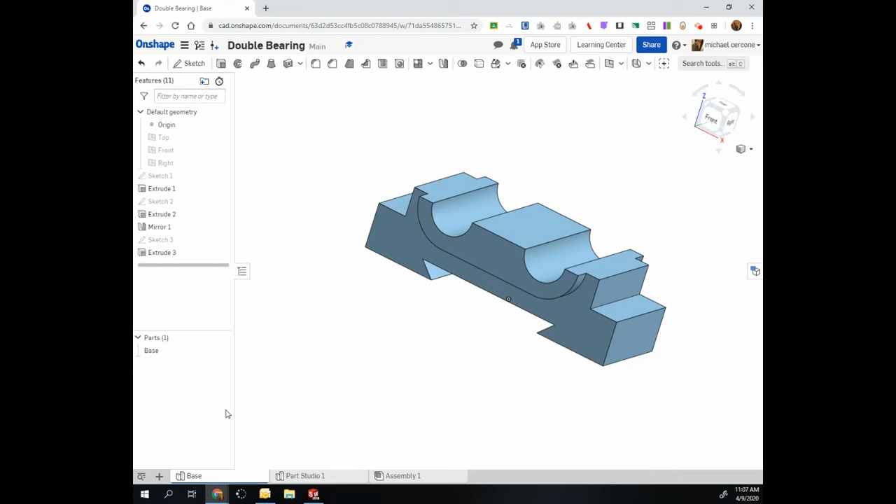I do want to remind you that I am just winging this. I have not practiced, so there may be mistakes.

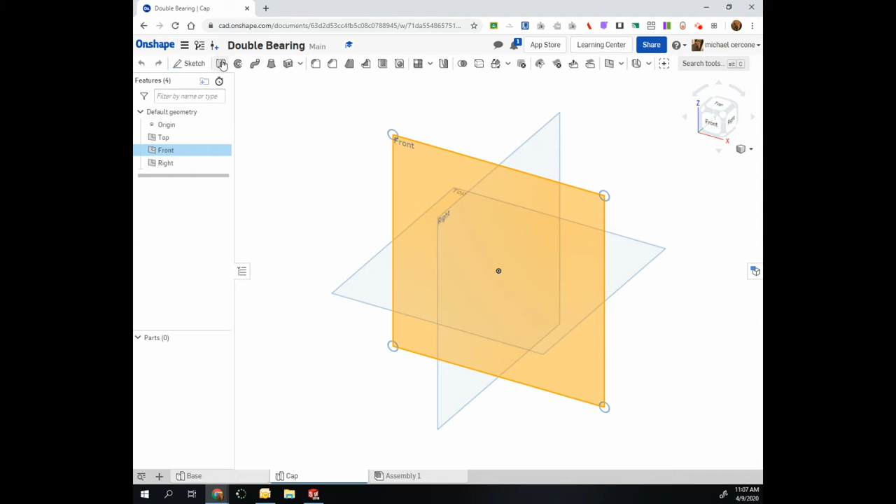Now I'm going to do the cap. So let me rename this for the sheet, and then I will rename the parts later. I'm going to start this the same way, starting along my front. And I'll start my sketch. I don't want to see any of these planes, so I turn them off. I'm going to go normal to.

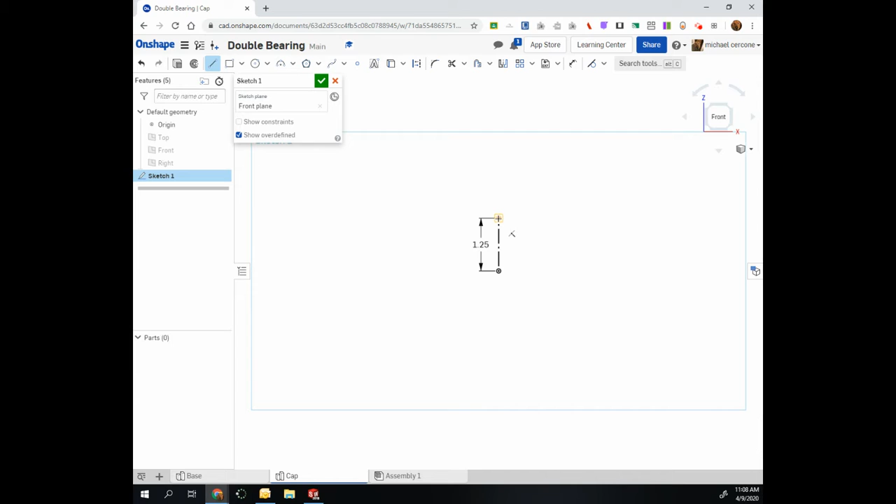I like the idea of starting with a construction line at the proper height. And now I'm going to just create the basic feature again. So align. This is 3.5. This time I'm adding the dimensions as I draw. So here's my basic feature.

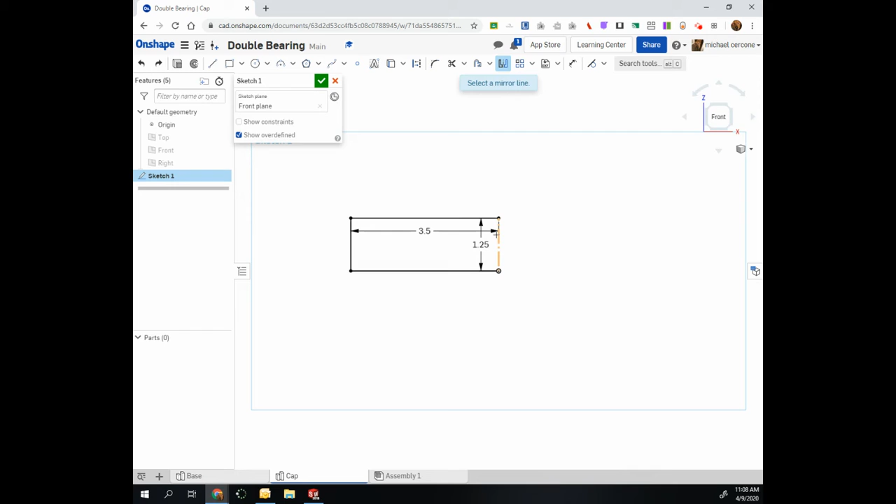I could mirror this. Now I could have drawn this from the top. I just decided to follow the same pattern that I went with on the first video. So that was a mistake. So mirror, select mirror line. Okay, this is an extrude, and I'm looking for symmetric and a distance of 3 again.

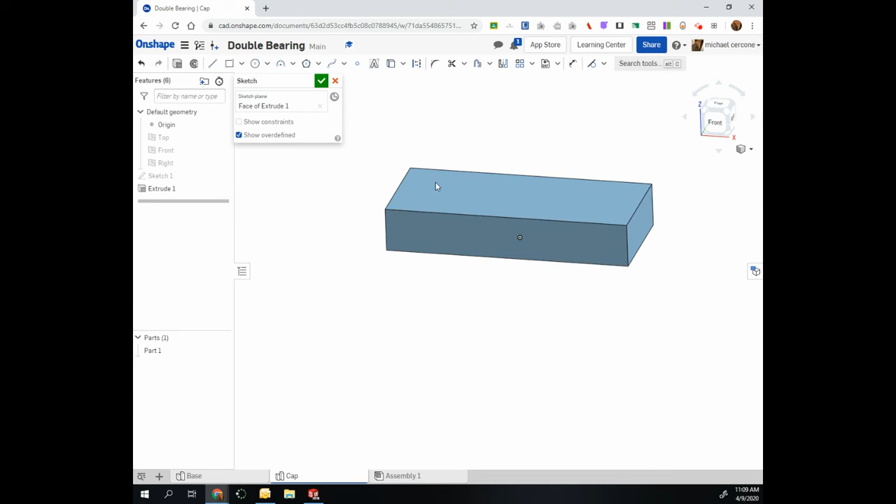I'm going to create on the outside the same exact way I did on the other drawing. So I make my sketch, normal to, construction line, that should have gone tangent, so I will add a relation there. So I'm drawing one line across. There we go. Now that is tangent.

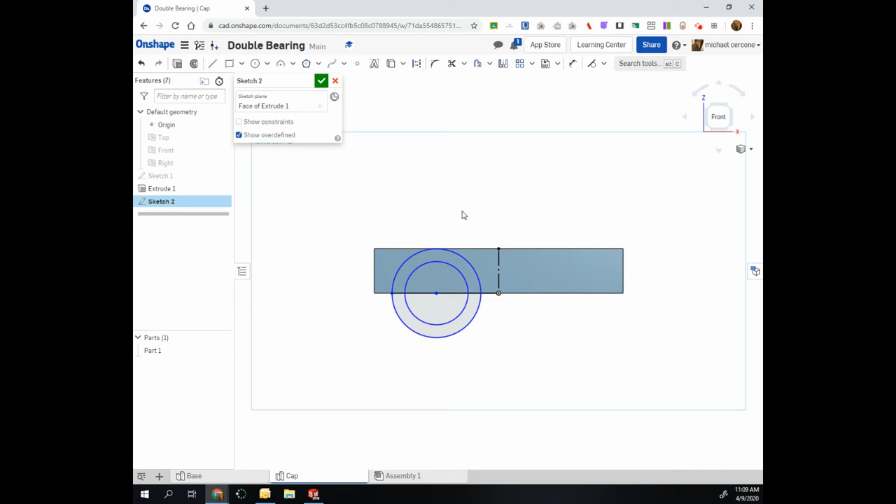I need a line across the top. Tangent formed. And I can trim. I don't need this information. So now a couple dimensions. I need the 3.5. Type D does bring up the dimension tool. And now I need a diameter of 0.75.

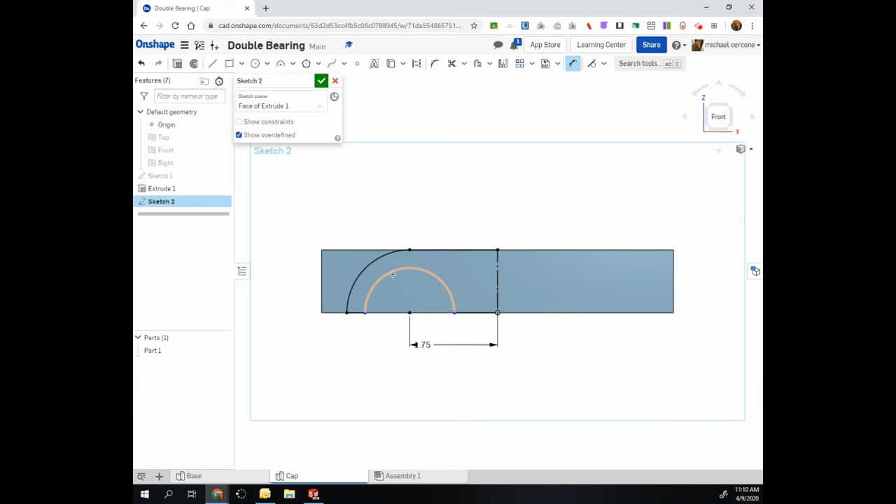And I'm going to close this off and mirror in 3D. So I'm extruding at 0.5. In this situation, now I need to mirror over what is the right plane because I kept the planes in the center. So I'm going to choose mirror, and the mirror plane is the right. The entities to mirror, I don't want a part, I want a feature. It's going to be extrude 2.

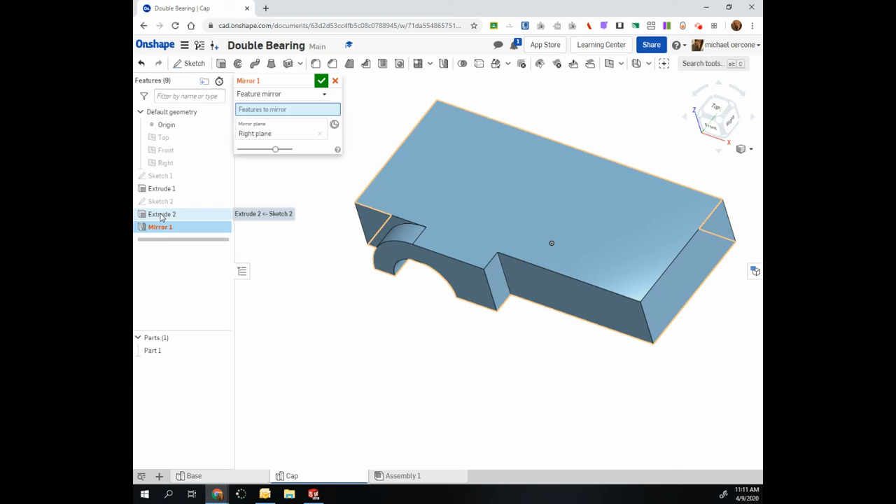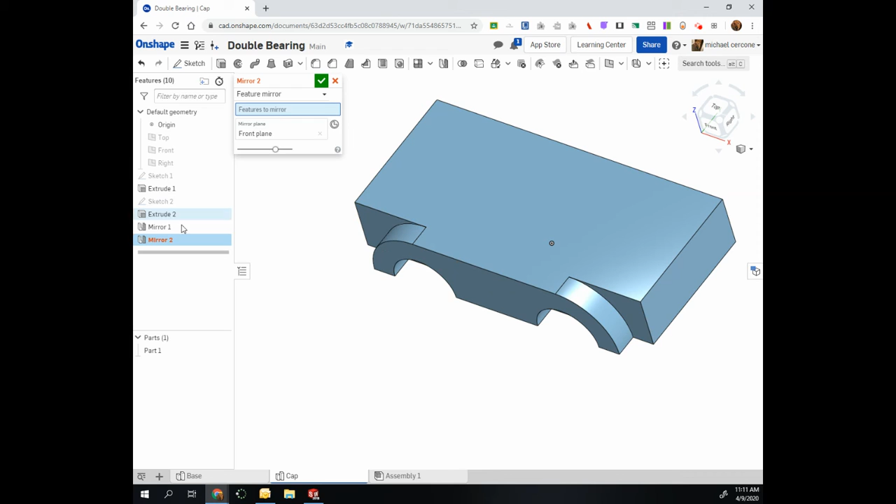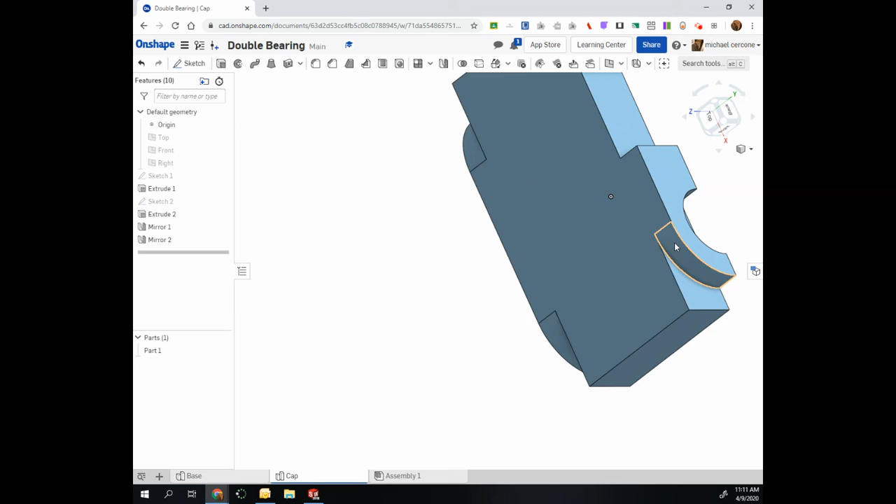So bring that over, except adding another mirror now. This time it will be over the front plane. And then the entities are not a part, they're a feature. I'm going to choose mirror 1. Doesn't want to let me do both, so I will do the mirror the way that I just did.

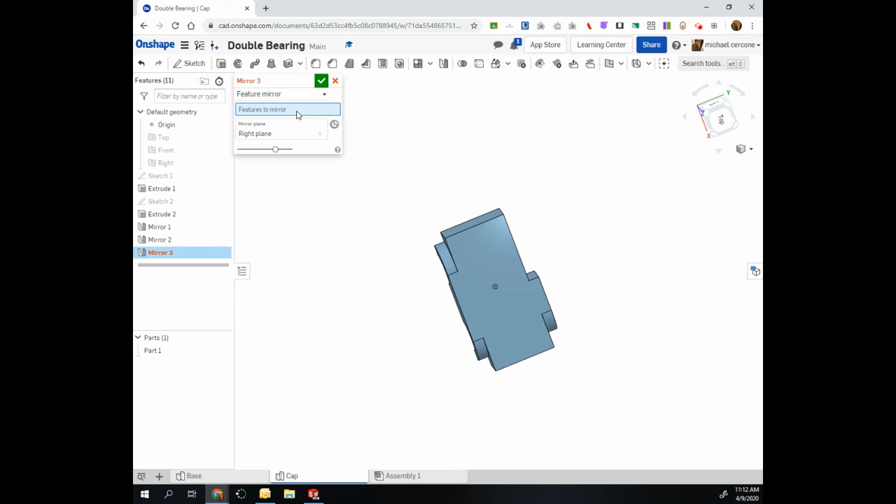So again, like I told you guys before, I had not practiced this, so I was going to have some hiccups. So my mirror plane is the right, the entities to mirror, mirror 3. Well, there we go. 1 and 2. Got it to work. There were some errors.

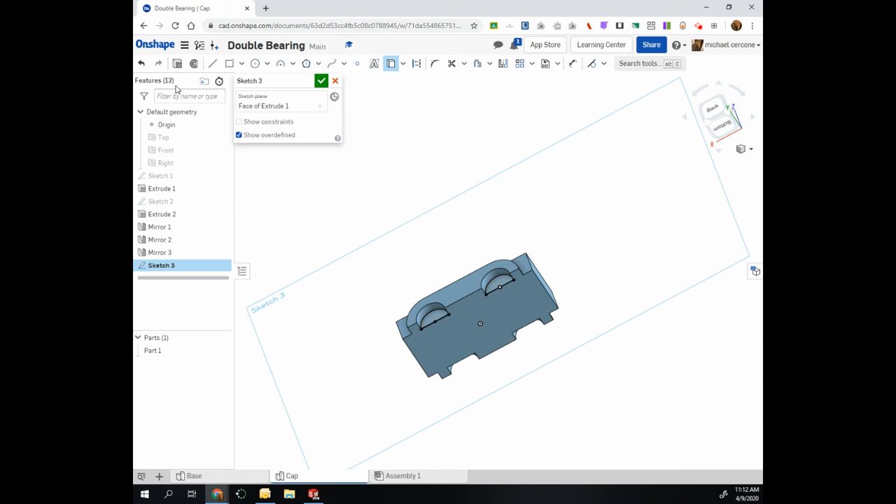Sketching again, selecting the plane, and I'm just using project as I find this faster. And removing through all. All right, I do need to add the holes to the top. I guess I will add those on this one. So I'm starting my sketch. You go normal to.

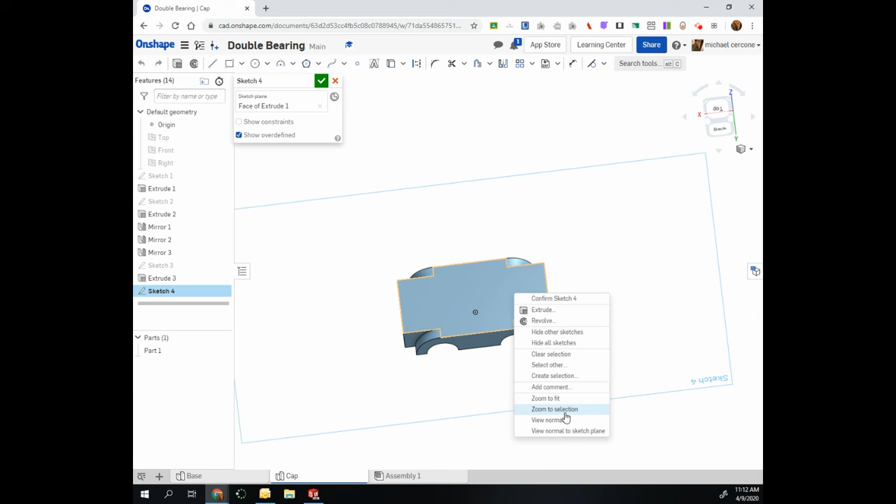I like the idea of some construction lines. I'm not sure why this one is red. There we go. And I need a couple circles. So there's one here, here, one here. So I selected all of those, and this would be symmetric. So left to right, those are now symmetric.

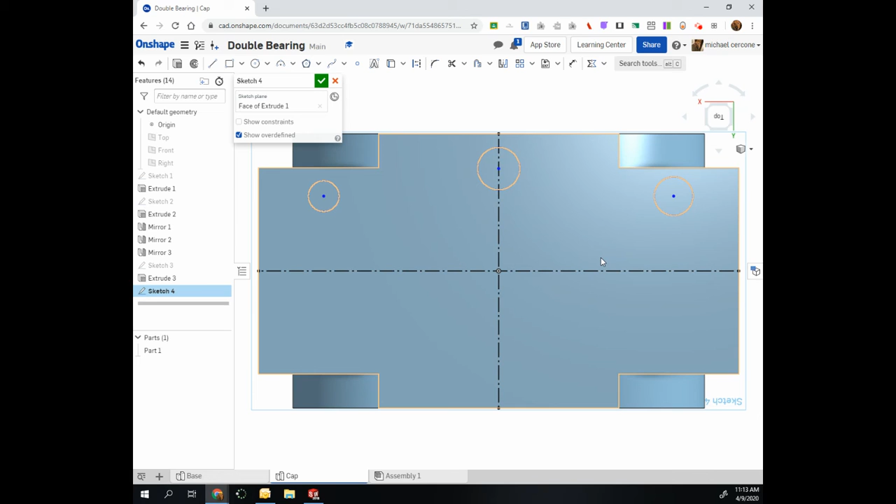And now, selecting center and the other center line, these are symmetric. Sorry, forgot to mirror. So I don't need the symmetric relation. Now, if I move this, they both should move in either direction. So that will help on my dimensioning part. And then mirror.

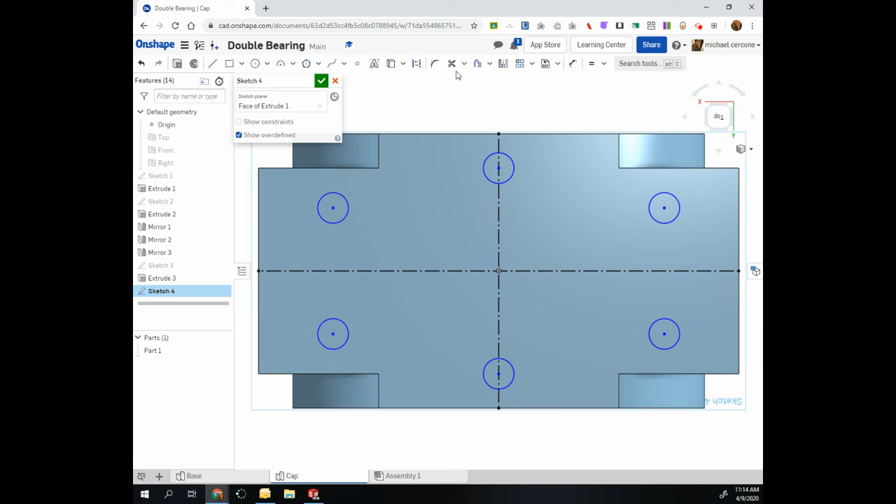All 6 holes are the same size. Let's see if there's an equal. There is. Now they're all equal in size. They are 0.516 in diameter. It's dimension one. And the spacing is 1.5 away from one another. And 3 inches from the center.

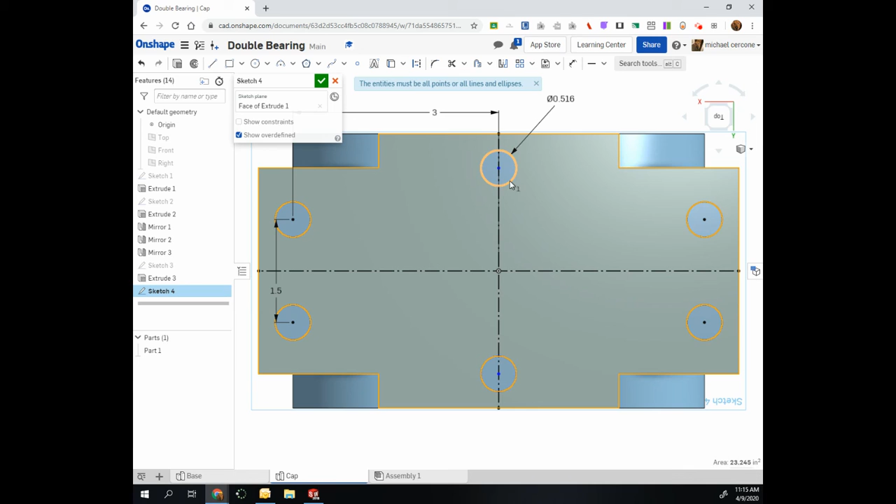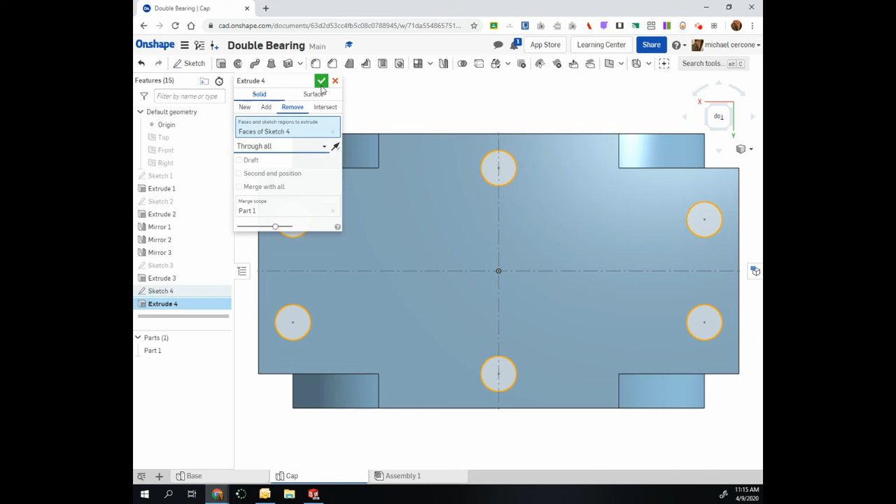And then these are located in line with this edge. Let's see if I can just add a relation. It's horizontal. That would fully define it. It's not. There we go. Now they're horizontal. And an extrude cut, I'm removing through all. And that completes the cap. I will draw the bushing in the next file or video.